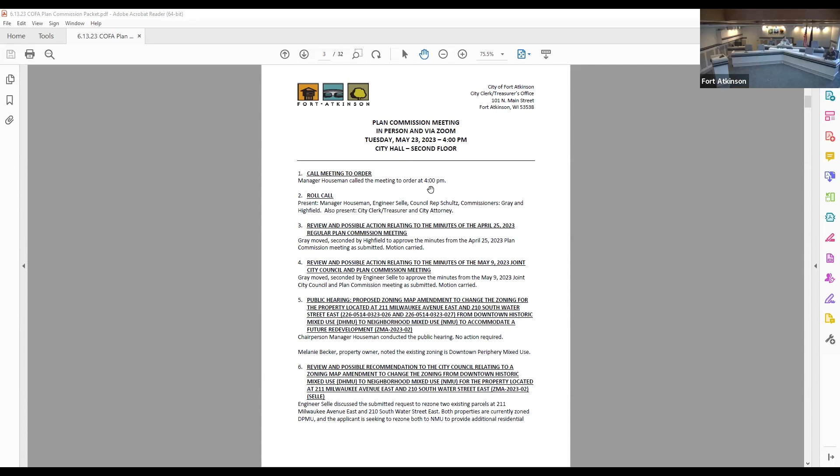Second. Okay, we've got a motion and a second. I think Engineer Selle did it first. Any discussion on the minutes? Okay, hearing none. All those in favor, please signify by saying aye. Aye. Any opposed?

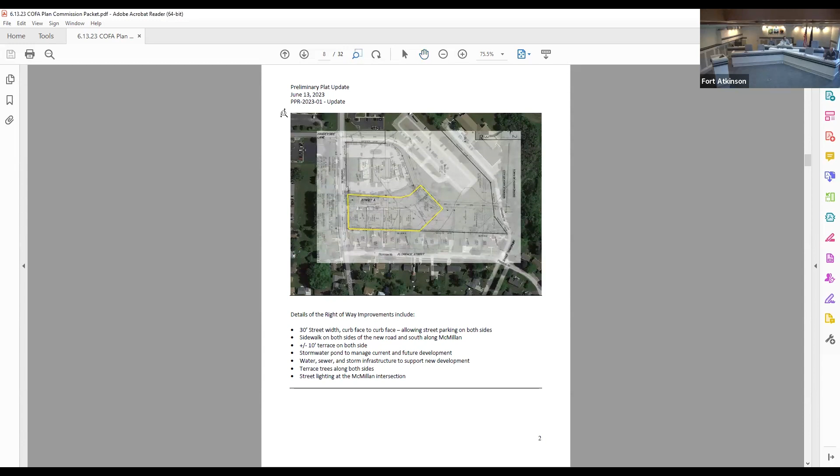Okay, that motion carries. Next on the agenda, number 4, a presentation of supplemental information relating to the preliminary plat for the property formerly addressed 426 McMillan Street. Engineer Selle, thank you.

This has come before the commission previously, and as noted in the memo, this is really more of an update. The Planning Commission reviewed the preliminary plat. You may recognize the figure shown on the screen here. This is for a new road that will be built just off McMillan Street, and that road will have 5 lots on the south side of it. 4 of those lots will be receiving houses that are moved from North 4th Street. The 5th lot, on the corner of McMillan and the new street, will be a multifamily duplex lot, a new construction lot at some point.

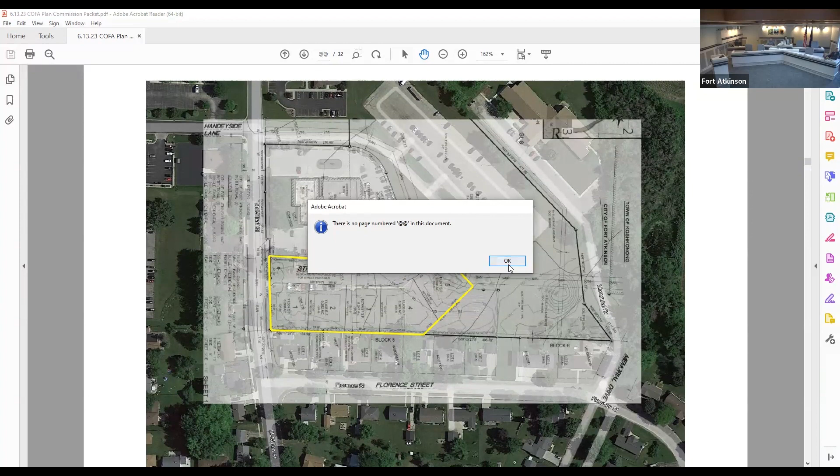What we didn't have at the time were the details of the road and the right-of-way improvements. In general, Planning Commission doesn't concern themselves too much with where we place various elements in terms of stormwater and sanitary sewer. But we do care about things like sidewalks, terrace width, and the general aesthetics of the development. Bear with me just a second, for some reason I can't advance. We'll do it the old-fashioned way here.

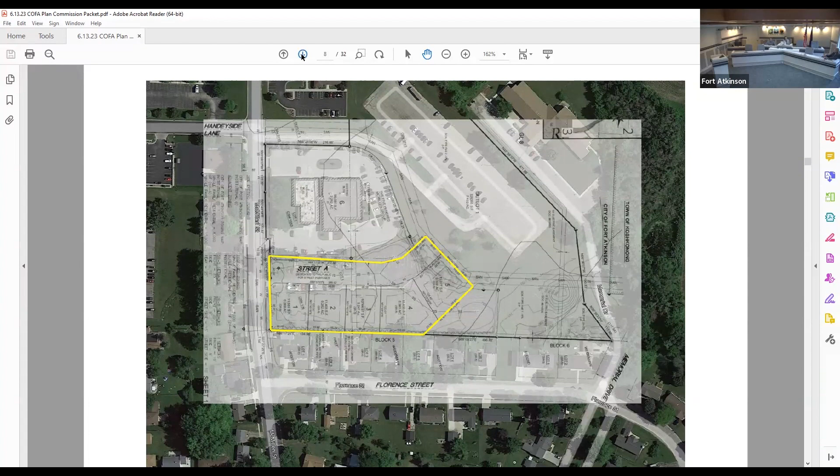So I just wanted to present that to the commission here for your review, ask questions. We have Jim Nelson in the audience with us from Fort HealthCare and Bill Pino, the design engineer from MSA Consultants, who is working on the project.

We did have a discussion with Mr. Pino about that stormwater basin. For now, it will remain a private stormwater basin to serve stormwater coming from the new road and the new developments, but it likely will eventually become a regional basin that the city will take over in the future. There'll be some additional developments occurring in this area, and that stormwater will be routed to this particular basin to comply with our stormwater requirements. So it will be a nice green feature in the area.